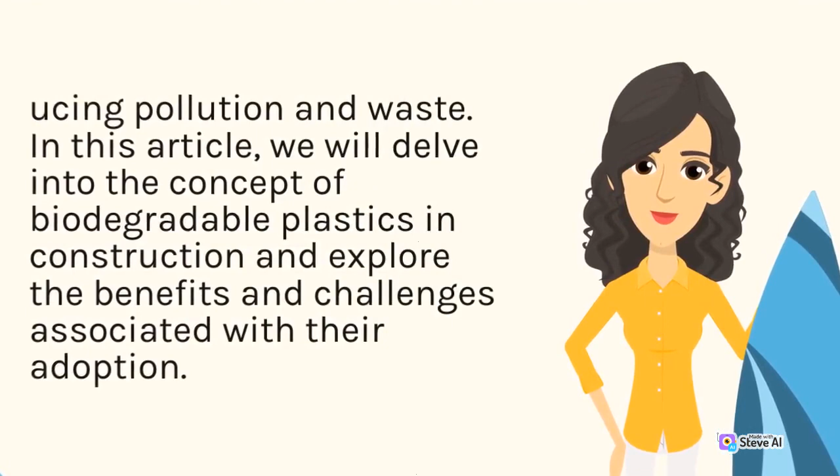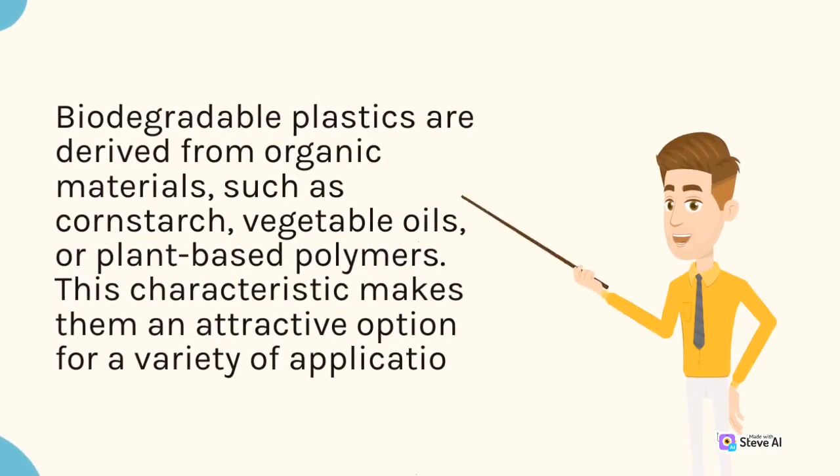Understanding biodegradable plastics. Biodegradable plastics are derived from organic materials, such as cornstarch, vegetable oils, or plant-based polymers. This characteristic makes them an attractive option for a variety of applications in the construction industry, where plastic materials are widely used.

Benefits of biodegradable plastics in construction. 1. Environmental preservation. By using biodegradable plastics in construction, we can significantly reduce the environmental impact associated with traditional plastic materials. The use of these sustainable materials helps to minimize the accumulation of non-biodegradable waste in landfills and the natural environment.

2. Reduction of carbon footprint. Biodegradable plastics are typically manufactured from renewable sources, such as plant-based polymers. This helps reduce the industry's reliance on fossil fuels, ultimately contributing to a lower carbon footprint. Additionally, the production of biodegradable plastics emits fewer greenhouse gases compared to traditional plastics, making them a more environmentally friendly choice.

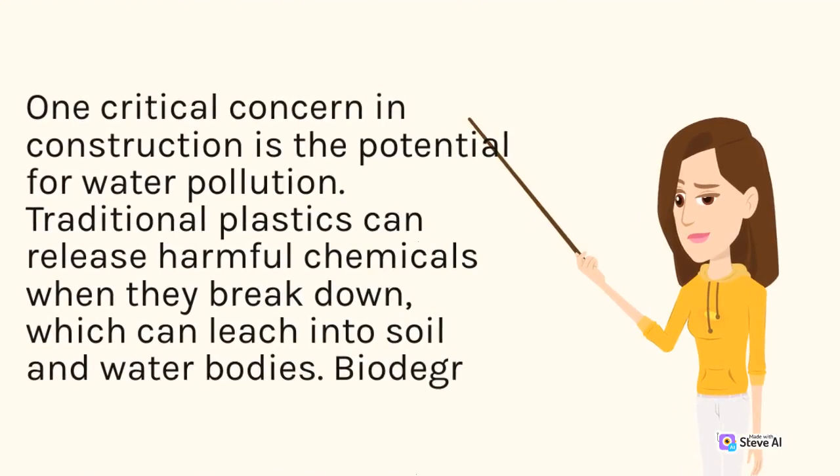3. Improved water quality. One critical concern in construction is the potential for water pollution. Traditional plastics can release harmful chemicals when they break down, which can leach into soil and water bodies. Biodegradable plastics, on the other hand, decompose into harmless natural compounds, thereby minimizing the risk of water contamination and preserving water quality.

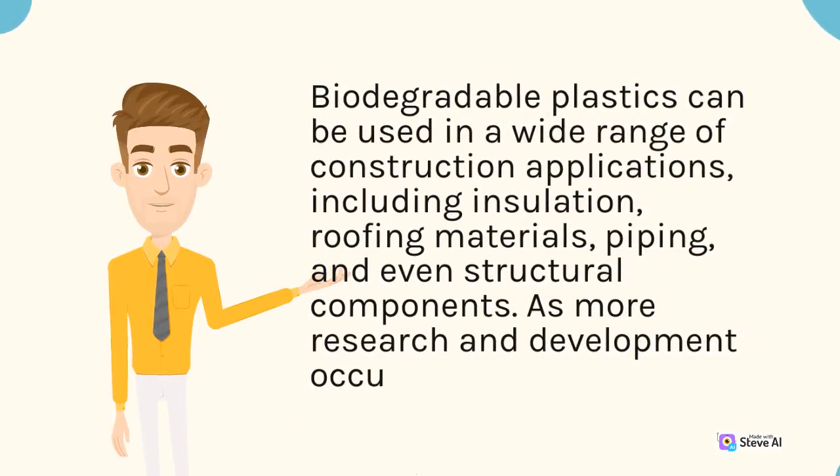4. Diverse applications. Biodegradable plastics can be used in a wide range of construction applications, including insulation, roofing materials, piping, and even structural components. As more research and development are done in this field, novel and innovative biodegradable materials are likely to emerge, further expanding the scope of their application in the construction industry.

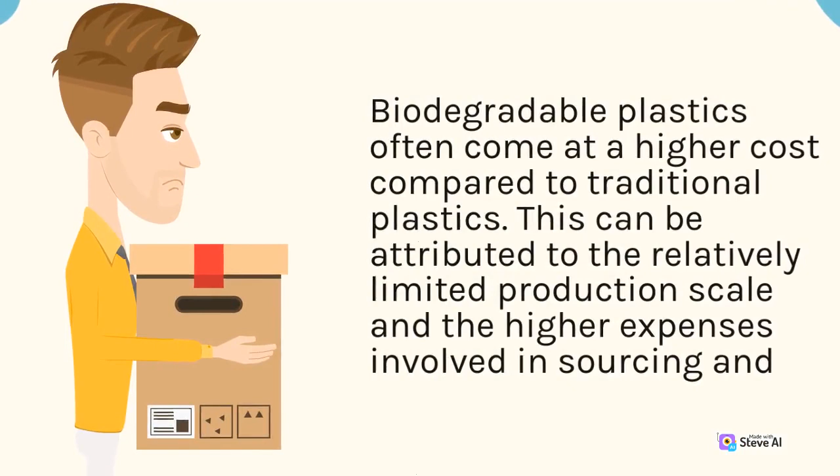Challenges and considerations. Despite the numerous advantages, there are certain challenges associated with the adoption of biodegradable plastics in construction. 1. Cost. Biodegradable plastics often come at a higher cost compared to traditional plastics. This can be attributed to the relatively limited production scale and the higher expenses involved in sourcing and processing renewable materials. However, as technological advances continue and demand increases, it is expected that costs will gradually decrease.

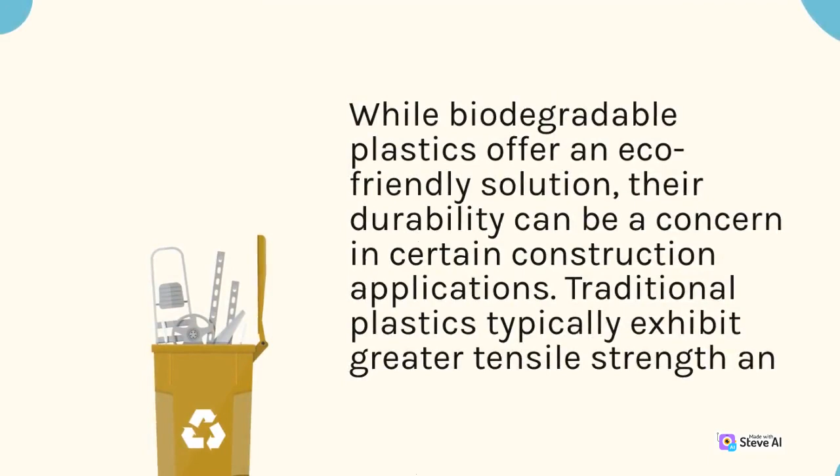2. Durability. While biodegradable plastics offer an eco-friendly solution, their durability can be a concern in certain construction applications. Traditional plastics typically exhibit greater tensile strength and resistance to weathering. However, ongoing research is focused on developing biodegradable plastics with enhanced mechanical properties to bridge this gap.

3. Waste management. Biodegradable plastics require specific conditions to decompose, such as exposure to heat, moisture, and microorganisms. Specialized waste management systems need to be in place to ensure their proper disposal. Adequate recycling facilities and public awareness campaigns are essential to ensure these materials are disposed of correctly to reap their full environmental benefits.

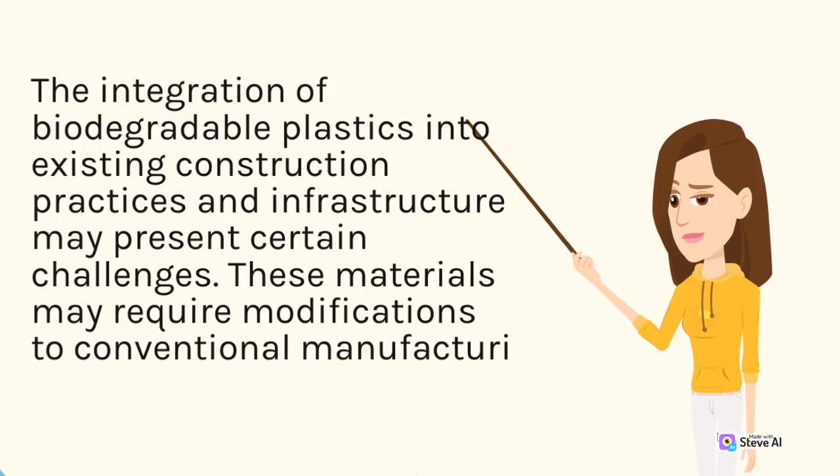4. Compatibility with existing infrastructure. The integration of biodegradable plastics into existing construction practices and infrastructure may present certain challenges. These materials may require modifications to conventional manufacturing processes and standardized protocols to ensure their successful incorporation into construction projects.

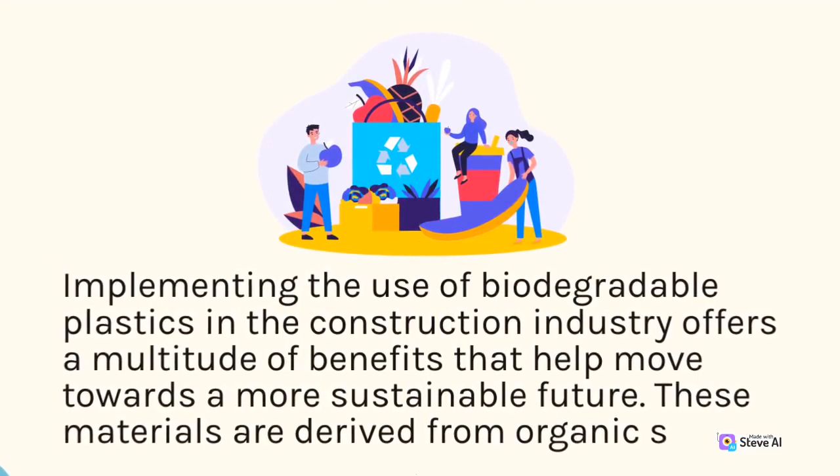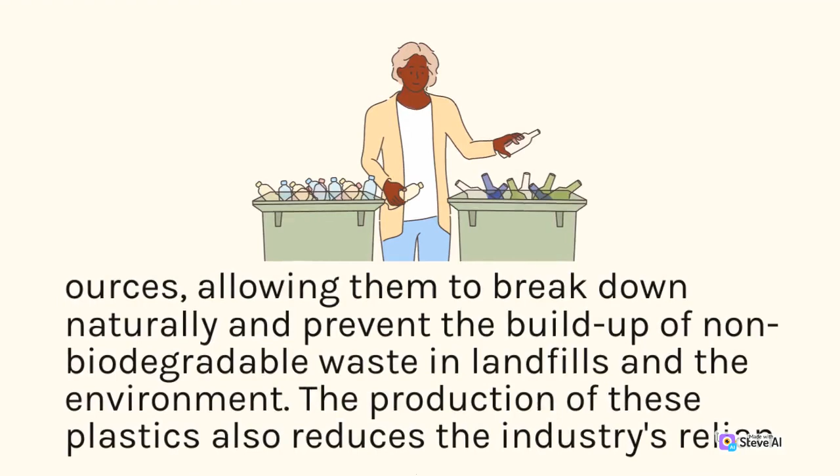Implementing the use of biodegradable plastics in the construction industry offers a multitude of benefits that help move towards a more sustainable future. These materials are derived from organic sources, allowing them to break down naturally and prevent the buildup of non-biodegradable waste in landfills and the environment. The production of these plastics also reduces the industry's reliance on fossil fuels, ultimately leading to a lower carbon footprint.

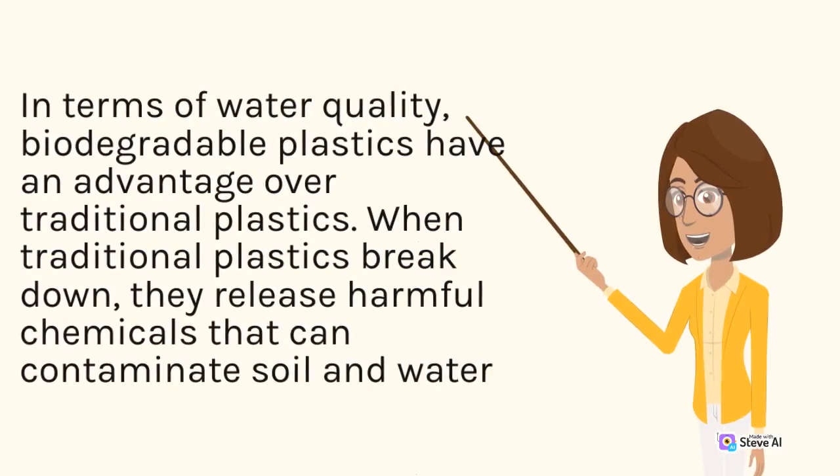In terms of water quality, biodegradable plastics have an advantage over traditional plastics. When traditional plastics break down, they release harmful chemicals that can contaminate soil and water bodies. However, biodegradable plastics decompose into harmless natural compounds, preserving water quality and minimizing the risk of water pollution.

The versatility of biodegradable plastics allows them to be used in various construction applications. From insulation to roofing materials, piping, and even structural components, these materials are adaptable and can serve multiple purposes.

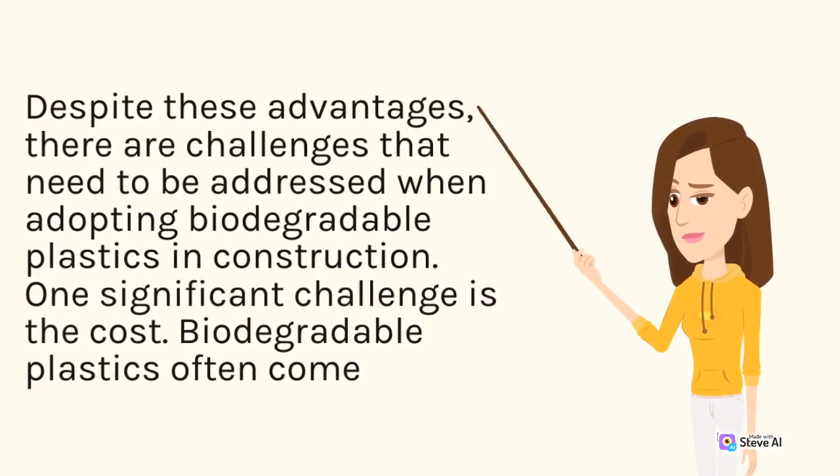Despite these advantages, there are challenges that need to be addressed when adopting biodegradable plastics in construction. One significant challenge is the cost. Biodegradable plastics often come with a higher price tag due to limited production scale and the expenses associated with sourcing and processing renewable materials. However, as technology advances and demand increases, it is expected that costs will gradually decrease.

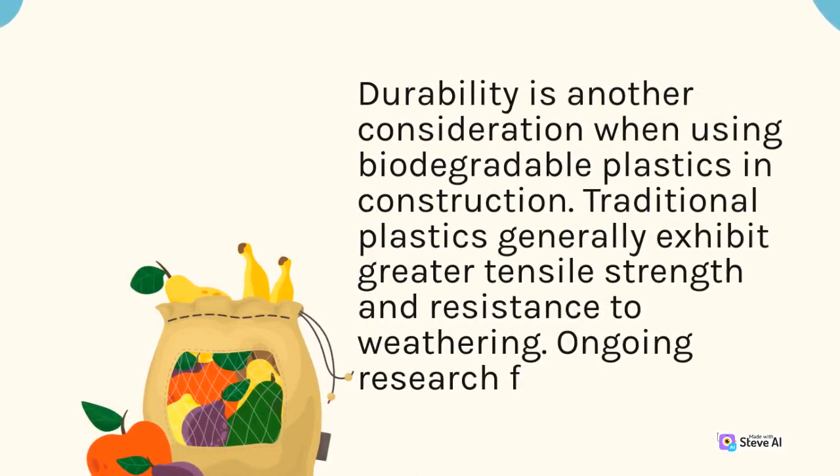Durability is another consideration when using biodegradable plastics in construction. Traditional plastics generally exhibit greater tensile strength and resistance to weathering. Ongoing research focuses on improving the mechanical properties of biodegradable plastics to ensure they meet the industry's durability requirements.

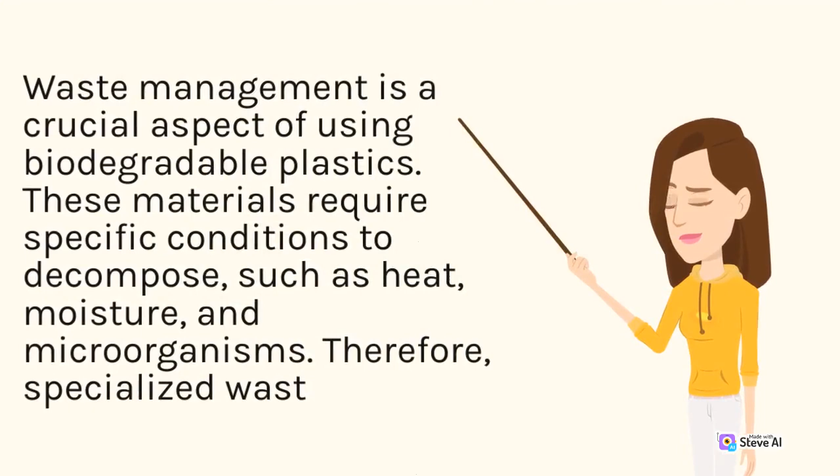Waste management is a crucial aspect of using biodegradable plastics. These materials require specific conditions to decompose, such as heat, moisture, and microorganisms. Therefore, specialized waste management systems must be in place to ensure proper disposal. Adequate recycling facilities and public awareness campaigns are essential to ensure these materials are disposed of correctly, maximizing their environmental benefits.

Additionally, the integration of biodegradable plastics into existing construction practices and infrastructure may present challenges. Modifications to conventional manufacturing processes and standardized protocols may be necessary to successfully incorporate these materials into construction projects.

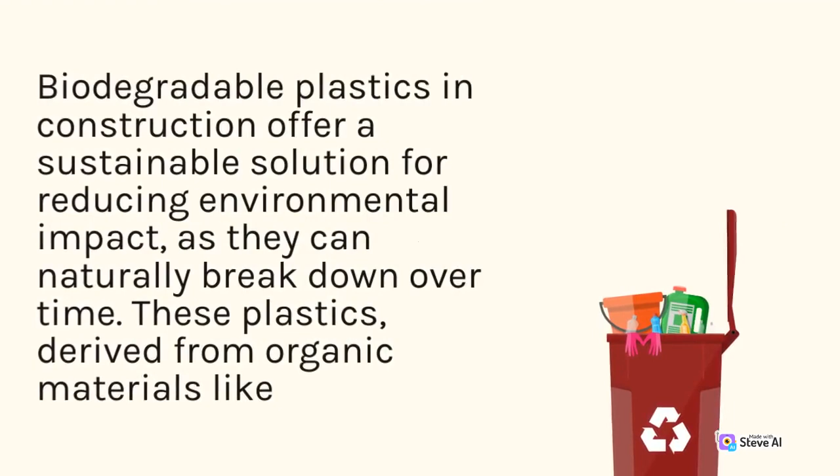Biodegradable plastics in construction offer a sustainable solution for reducing environmental impact, as they can naturally break down over time. These plastics, derived from organic materials like cornstarch and vegetable oils, have the potential to replace traditional plastics in a wide range of construction applications.

The benefits of using biodegradable plastics in construction are numerous. Firstly, they help preserve the environment by minimizing the accumulation of non-biodegradable waste in landfills and nature areas. This reduction in waste promotes a cleaner and healthier environment. Moreover, the use of biodegradable plastics helps decrease the industry's reliance on fossil fuels, as these plastics are typically made from renewable sources. This reduction in fossil fuel consumption contributes to a lower carbon footprint and reduces greenhouse gas emissions during production.

Another advantage is improved water quality. When traditional plastics decompose, they release harmful chemicals that can contaminate soil and water bodies. In contrast, biodegradable plastics break down into harmless compounds.